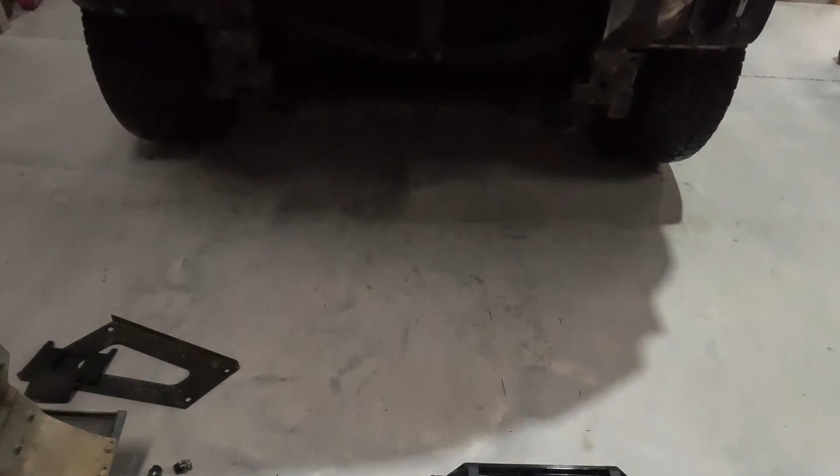Well, the project for this week is I'm going to fit a winch to this winch down here to my 2018 Isuzu DMAX. The DMAX that I have had a factory alloy bull bar, which I don't want to get rid of, mainly because I don't want to pay for a new bull bar. And you can't mount winches to your alloy bull bars, or at least not this one. I could buy a winch caddy that'll apparently fit this bull bar, but they're around $700, and I've got everything I need to make one, so I've not done something like this before for a four-wheel drive, so I thought I'd give it a go.

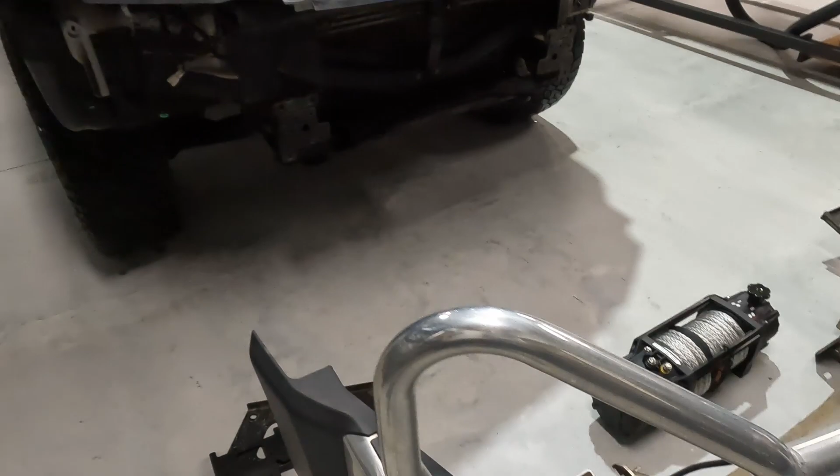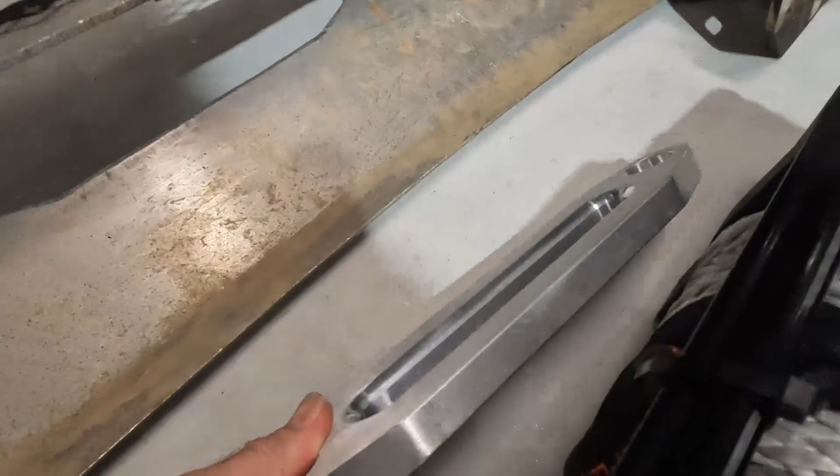I've gone ahead and just removed the bull bar, made sure that the winch is going to fit, which I thought was pretty important, and then I've gone ahead and cut the hole that you can see down there for this faceplate that the rope of the winch comes through. So that fits in there like that, all nice. And I believe that that's about all I've done.

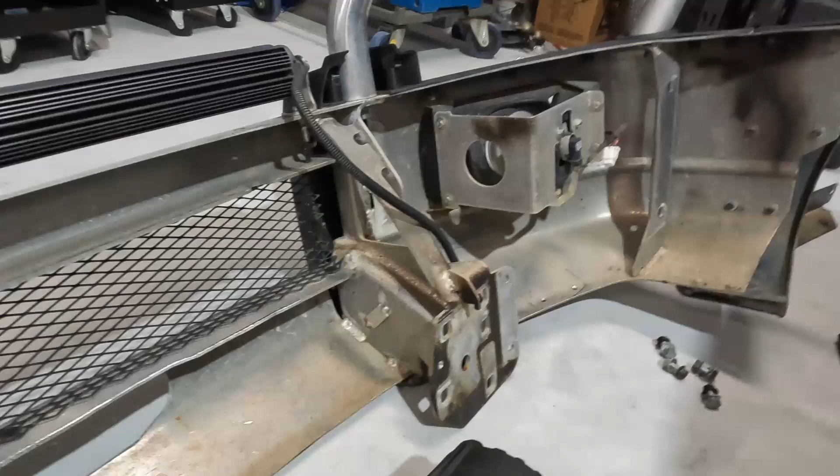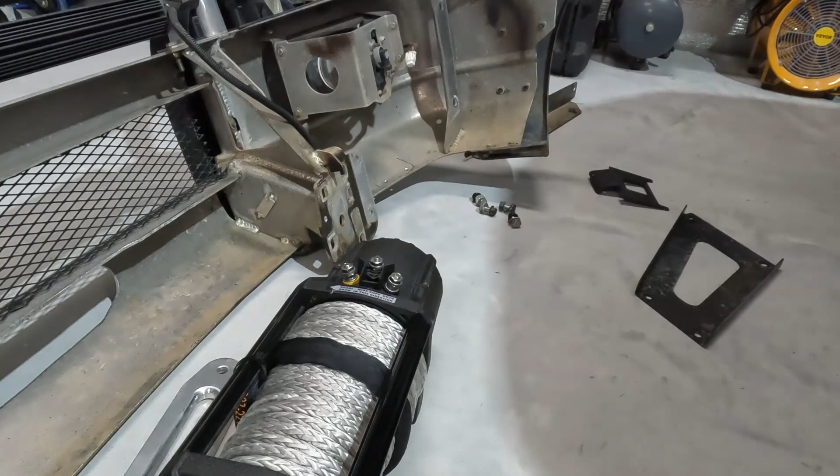So the next step will be to model up the winch caddy, which will mount from this plate over to the same plate on the other side, and we'll have a flat section coming out that the winch will sit on. I want to model that up in Fusion 360 because I think it's just a good process to make sure I test the design to the capacity of the winch, which is a 12,000 pound winch, so that's 6 ton thereabout. And so I want to simulate the design to make sure that it's strong enough and not going to fail if I go to use the winch.

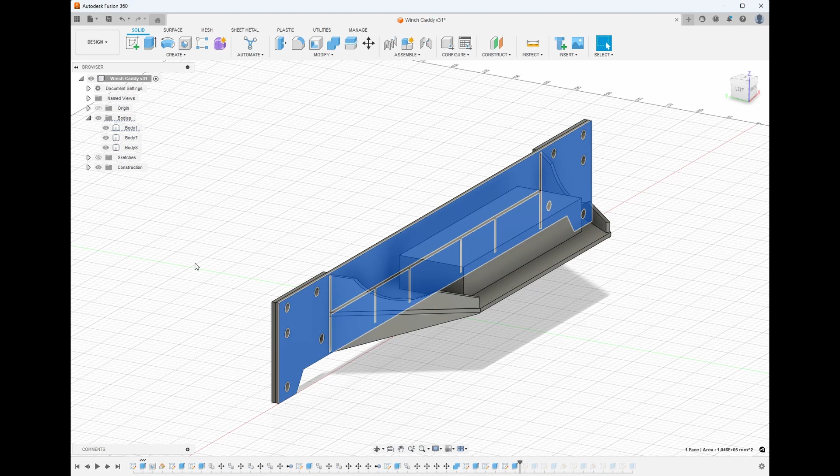So this is the winch caddy designed in Fusion 360. You can see the main plate that goes between the two chassis rails of the DMAX. One chassis rail coming back up here, the other one up here. You can see the main plate that the winch is going to sit on, and then a good amount of bracing for structural support. I've also got a few extra shapes in here, these two plates at the back to simulate the front of the chassis, and this block that you can see acting as the winch. Those shapes are used for the simulation.

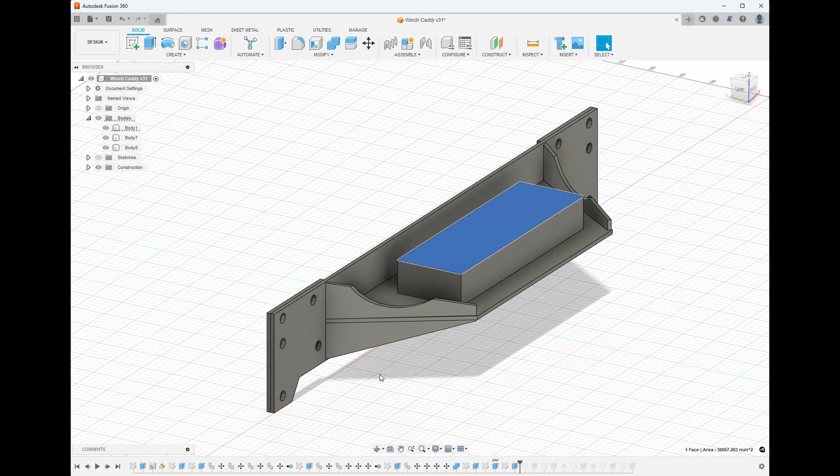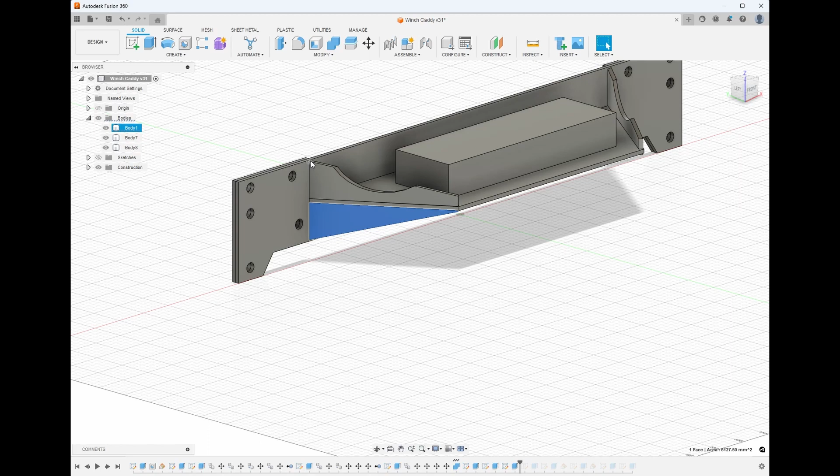Now, when I first simulated this, it wasn't strong enough. This plate was flexing. I didn't have this brace or these braces. I only had the 4 braces underneath. With that, it only had a factor of about 0.4 before distortion started to occur. The distortion was in this main rail. Now, I thought to add these braces right at the point where the chassis rail meets, and that's because this is going to be a shearing force across here, and shear strength of metal is really, really strong.

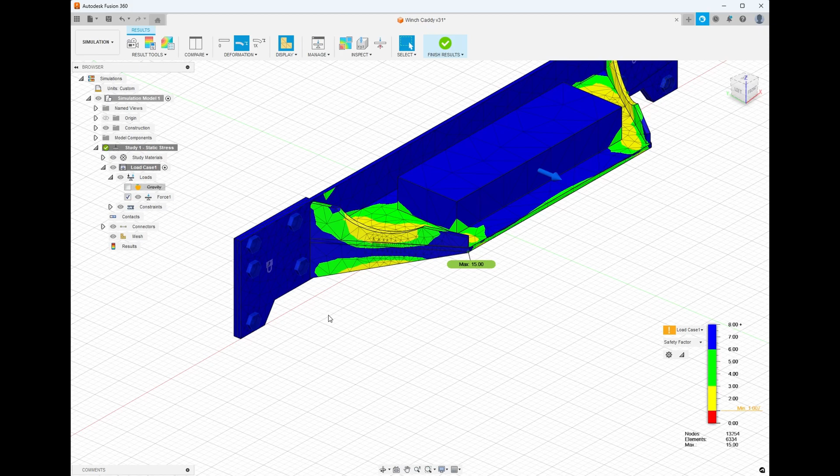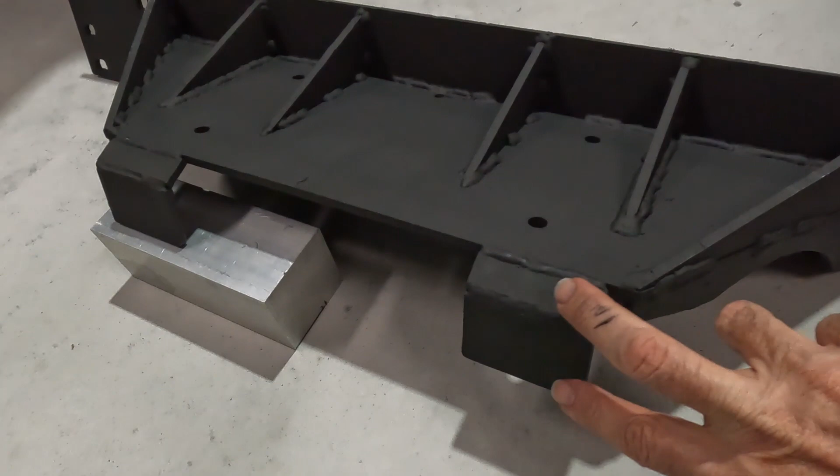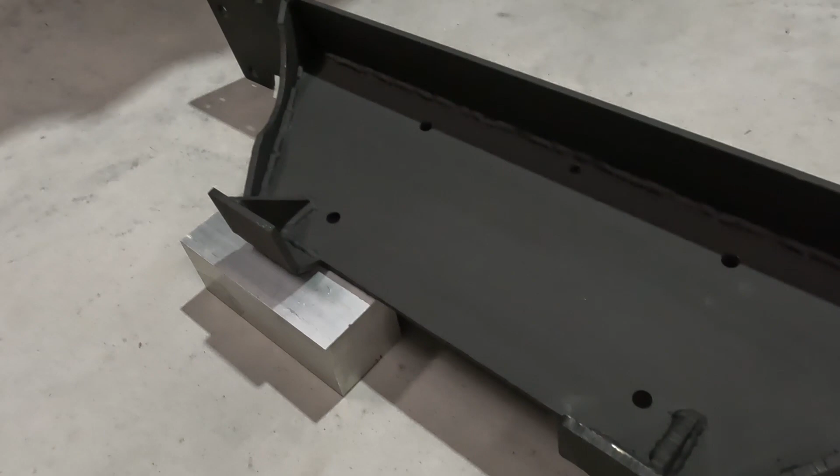So here's the winch caddy. This is the underside. So you can see these braces that we saw in the Fusion 360 design. I've gone ahead and added a few little tabs out the front to take the winch faceplate. Okay, so this is the top side. You can see the winch mounting holes in here. I've got another hole to let water drain out of it so it doesn't rust. And you can see these mounting plates are also braced.

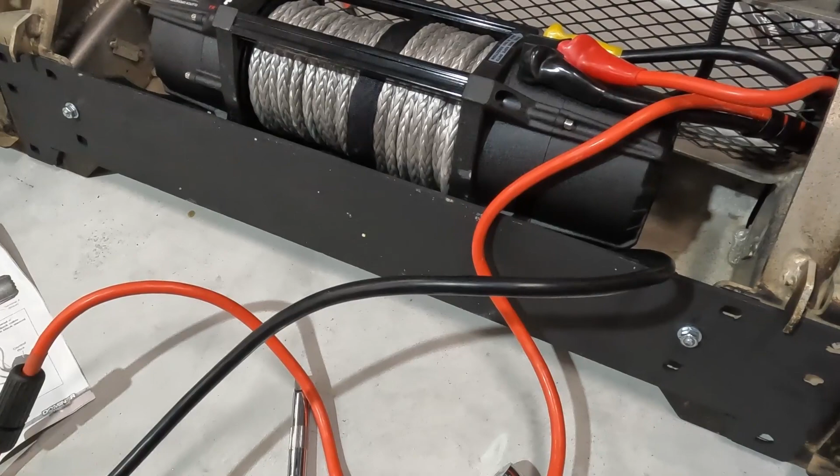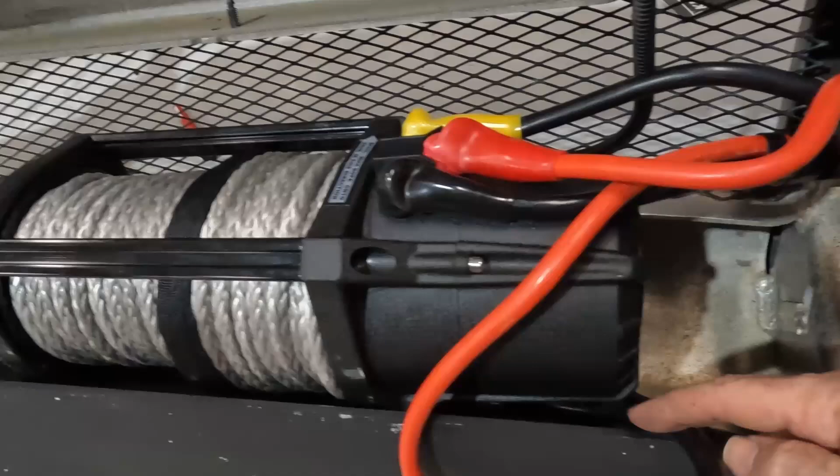Well, I have the winch all mounted in now in the caddy, in the bull bar. Got the electric box down to the right hand side of the bull bar there under the indicator. I'm going to use the wireless control for that, so I don't need to get under, but even if I do need to use the wired controller, you can get your hand up in here and access the plug quite easily, so long as you're not in a ditch. Cables come through the hole that was already in the bull bar there, connect to the motor. I put it all together, I had to pull it apart because I didn't realize there's a terminal underneath for the earth, and so I've just got to wire up those together.

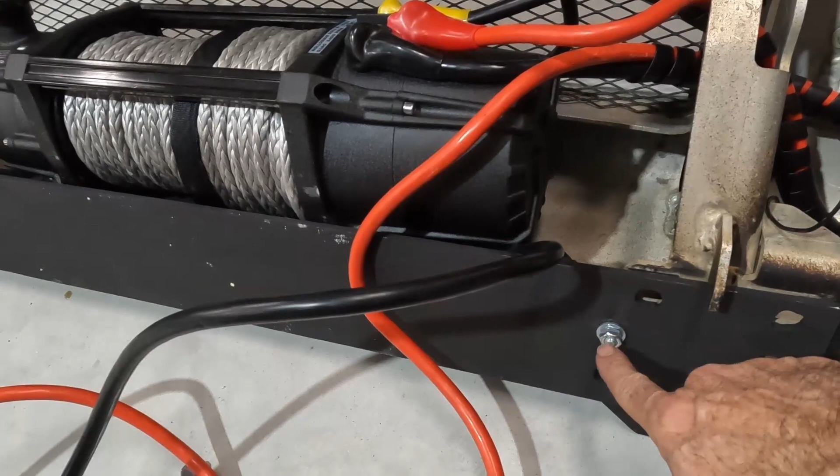I've drilled a hole through the bull bar into the winch caddy and fixed a high tensile bolt both sides, and so that holds the winch caddy to the bull bar. It's fixed as a unit. There's these hooks here, they're useful for getting it slung onto the vehicle before you start bolting it up. The alignment is all pretty good. I'm very, very happy. So it's just getting it up onto the vehicle now and then wiring up the positive and negative to the battery.

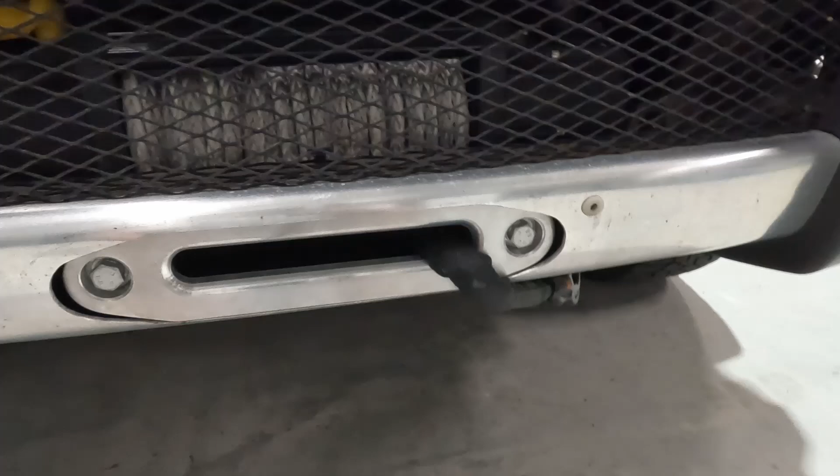So it's all done. I'm pretty happy with the end result. It was fairly easy to lift the bull bar onto the car. I just had to get my wife to help me get those hooks on the front plates of the chassis rails, and then I was able to bolt it all into position. The winch looks pretty good in there. You can't see it very much, which is what I love. It's nice and concealed. Once I get the number plate screwed on, you won't see any of this plate. You'll hardly know a winch was there.

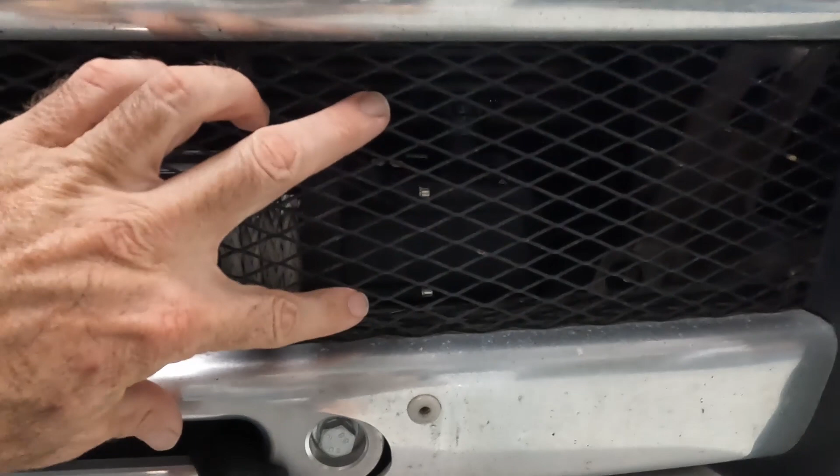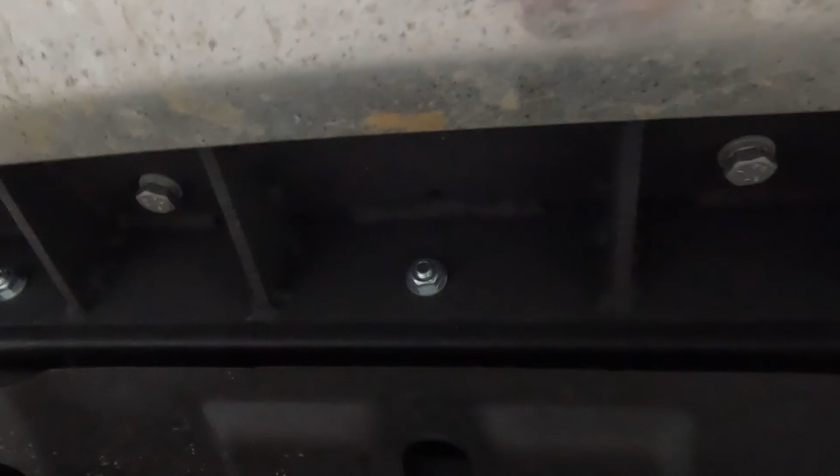The clutch knob that is on top of the winch motor there, I can get to that by opening the bonnet and reaching my hand down behind the grille. I can reach to that so I can access it as it is, but if that gets frustrating, I could just cut a hole in this front grille. So that's all done. You can see the caddy that I made up in under there. I'm going to call that complete.